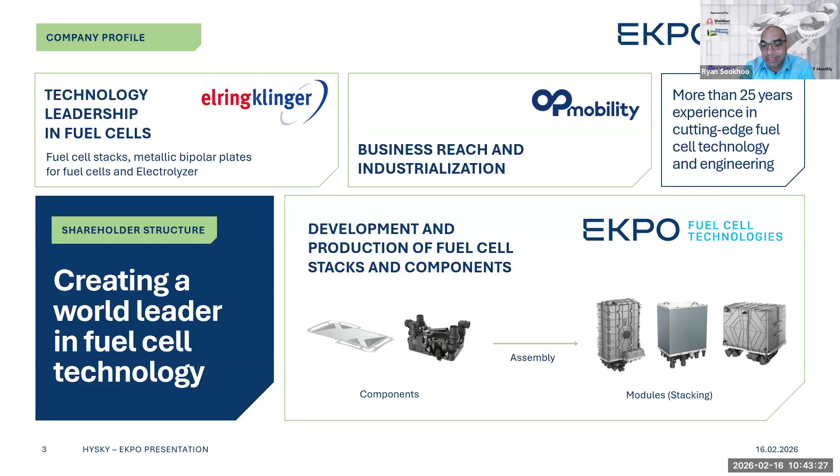EKPO is headquartered in Germany in an area called Dettingen. If you're not familiar with Dettingen, that's okay, it's essentially just outside a 30-minute drive from a place called Stuttgart. I'm sure you've heard of Stuttgart, home of Porsche. If you ever get a chance, you can actually go to the Porsche factory and do an amazing tour.

EKPO has complete stack building mass manufacturing facilities located in Germany, with roughly just over 220 employees. We're continuing to scale to build into those key markets we're talking about. This facility was established in 2021. I'm going to show you some amazing videos about it. I think you'll be quite impressed by the investment we've made in bringing mass manufacturing and a high level of quality into the fuel cell application.

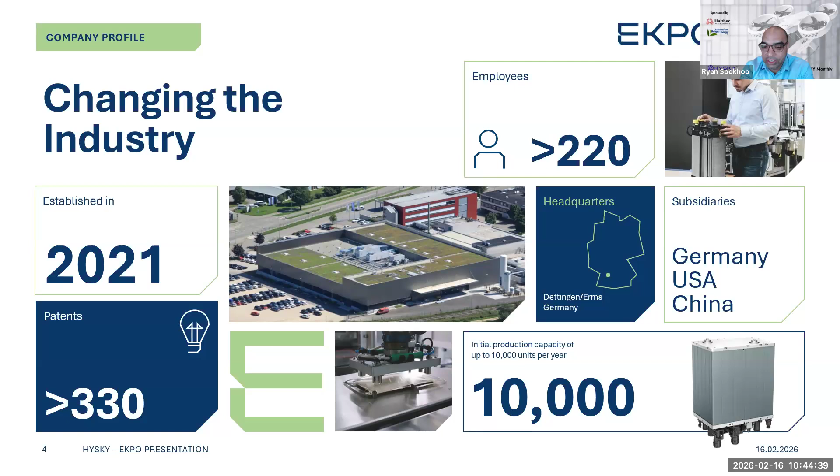When we stare into the product offering of EKPO, it's really about addressing the markets that are moving today while leveraging our core technology. I'll start with the unit on the left, the NM5. This unit was designed with modularity into it, looking at applications where the power node may not be that high, below 30 kilowatt or even 15 kilowatt. But there were applications such as material handling, potentially even drones, where this lower power node, this sweet spot around 15 kilowatt, the architecture we had as a fuel cell had great value, because at 15 kilowatt, all of our fuel cells are liquid cooled.

Once you start to drop below that 15 kilowatt node, you start looking at other technologies such as air cooled fuel cells. So we made the determination that at this power node, having modularity and enabling our partner to scale as their business needs grew by putting multiple of these units together. We have the ability also on our stack side to put it together to essentially act as a partner.

We don't make full systems in the sense of a complete power module with all of the balance of plant. We work with our partners to understand, are they at the stage where they want us to contribute a little bit more on the balance of plant, or the fuel cell? We'll get into how that relationship varies with EKPO, because that's a big part of our DNA.

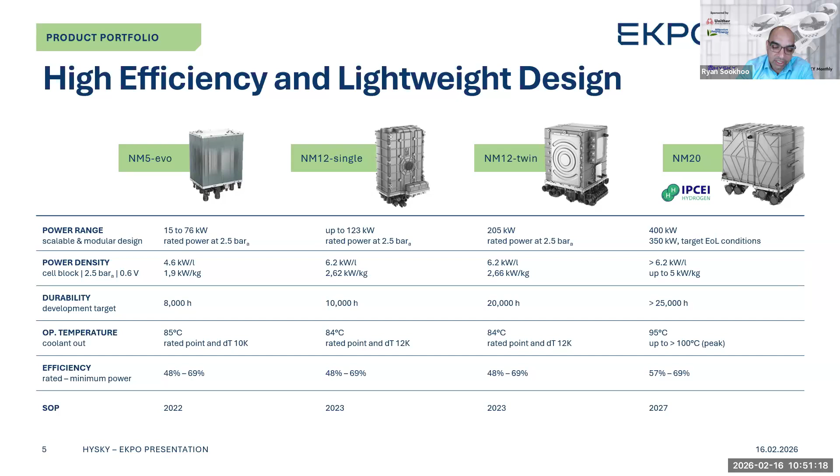When you look into EKPO's DNA, at the end of the day, I think I said our mission is to partner with the industry, and that means being flexible on how we engage with our partner. So there isn't one way only to work with us. We recognize that we're making the investment also in the technology, but our partners are making sizable investment in building the systems. So there has to be great value for them.

And our strength is really around the stack and what I would call critical balance of plant supply, meaning those key components that are needed to run the stack efficiently and get you the best performance possible. So traditionally from EKPO, you will get a stack, which is this blue area that you see here, highlighted as stack module. And that comes with the enclosure, it comes with the cells, and it comes with all the required sensors needed to monitor the stack.

But what we don't do is we actually do not supply things like the coolant pump, because those things, back from the integration days, are very sensitive to the application - where you put a pump, how to service it, how to prime the cooling system. All of that learning, we realize it's better to have our partners take care of that part. And that includes the anode recirculation loop, which is quite important for a fuel cell operation.

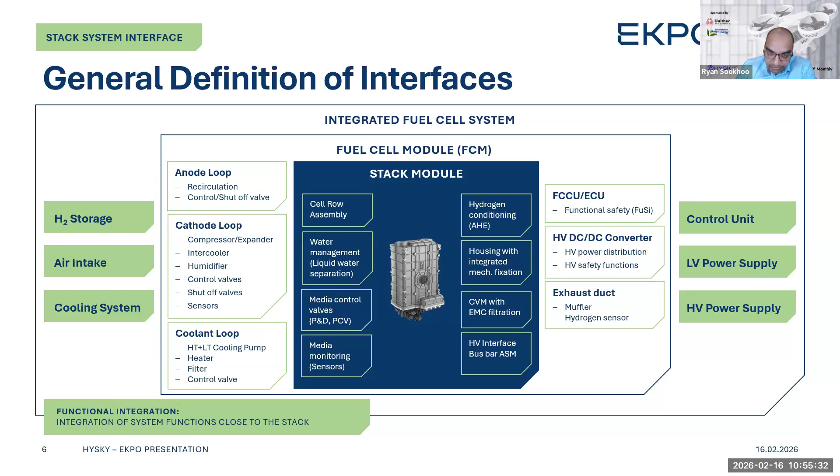For this part of the presentation, I wanted to highlight the video because it's really important for you guys to feel how real this market has pulled forward and the investment made. If you ever have a chance to come to our headquarters, we would be happy to host you, for you to see the fully automated lines operating. As you walk through our massive facility, you will feel the production element around it. It's not a prototyping shop kind of feel. When you go through it, you feel that element of production level and high quality, like repeated volume initiative.

And we made this investment in this facility because we also want to drive down the cost, right? We want to show that making the step into mass production, while pulling along the technology, is our role, to basically give you a high performance unit with the lowest possible price. And as we talked about, our parent companies are very large in mass manufacturing, so we're able to leverage their learnings, their buying power, to basically bring all that benefit to the fuel cell market.

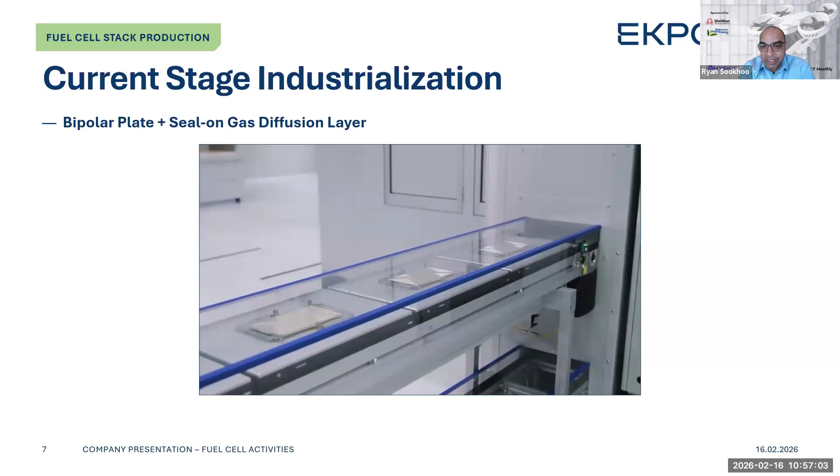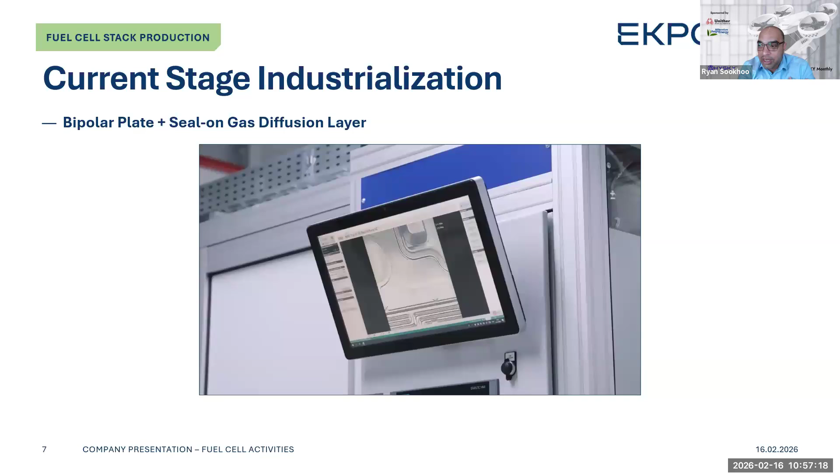So hopefully this video comes through, but it's essentially fully automated, this facility. And as you can see, the lines with all of the laser checking, the plates are inspected, built, seals are added, compressed fit, welded together, and they're also cleaned throughout. So you would think that as you go through this facility that these fuel cells are being produced at tens of thousands a year, because of the scale of investment and quality that we put forward.

And as you saw, the molding and seal, these are critical parts of the fuel cell's durability, and that's why we automated it to remove any possibility of quality issues that would be down the line.

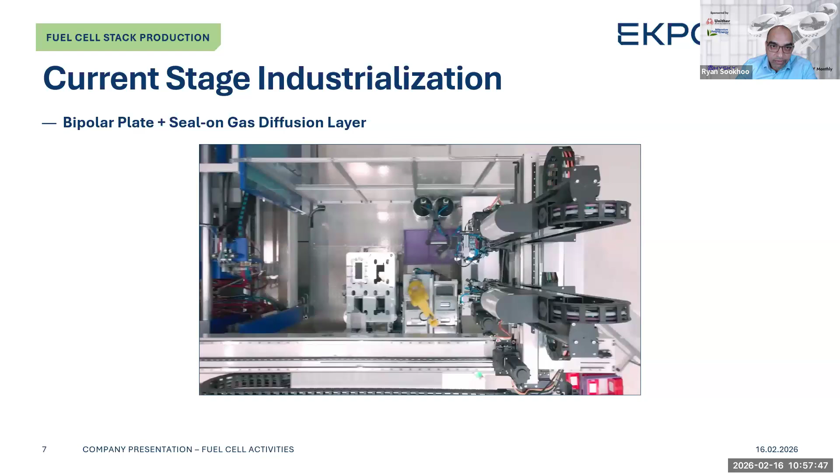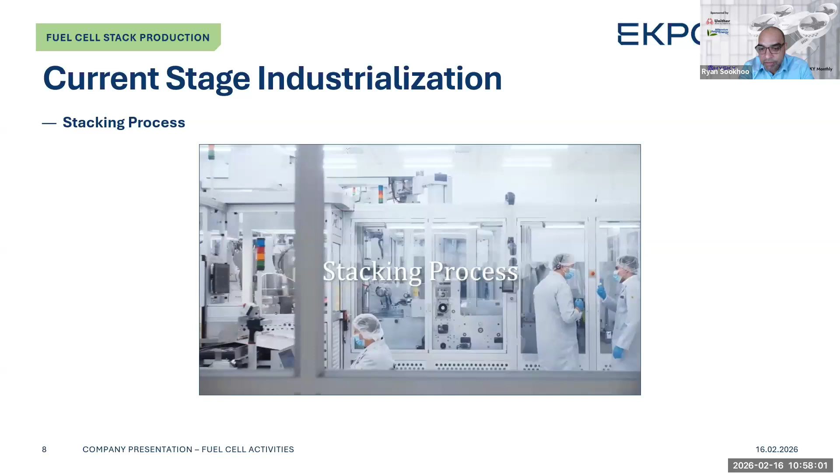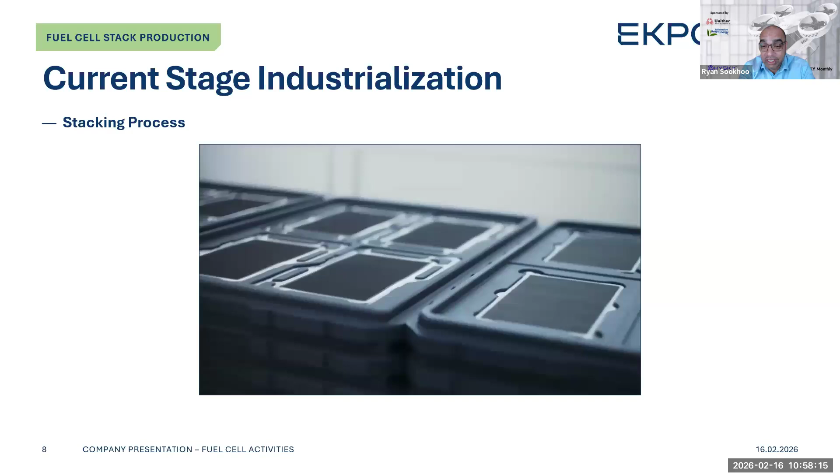We took that same level of investment from a component stage of production and quality, and we put it into the stack assembly. So all our stack build is fully automated. And in order for you to get access to the stack room, you would essentially have to go through about 3 clean rooms. So high level, high focus on automation and high focus on quality, as we are trying to show this repeatable level needed.

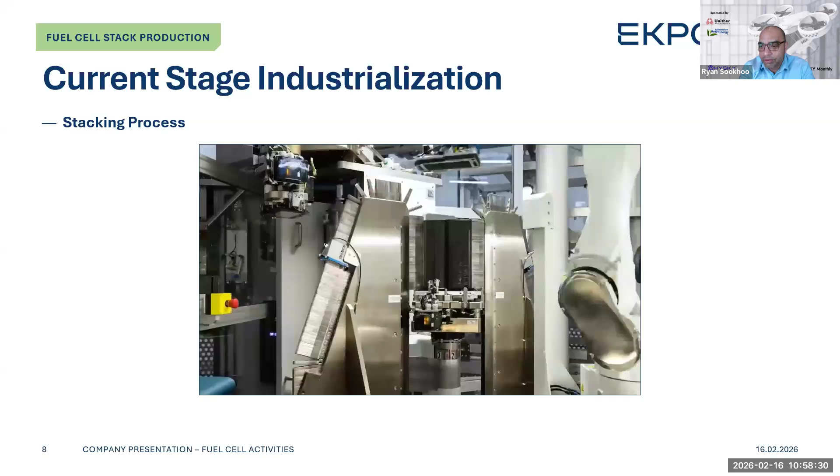And I think that's a really big story when you're looking at aviation and wanting high quality behind the products that you're engaged in, so that you feel it's completely repeatable, and the performance is the same all the time.

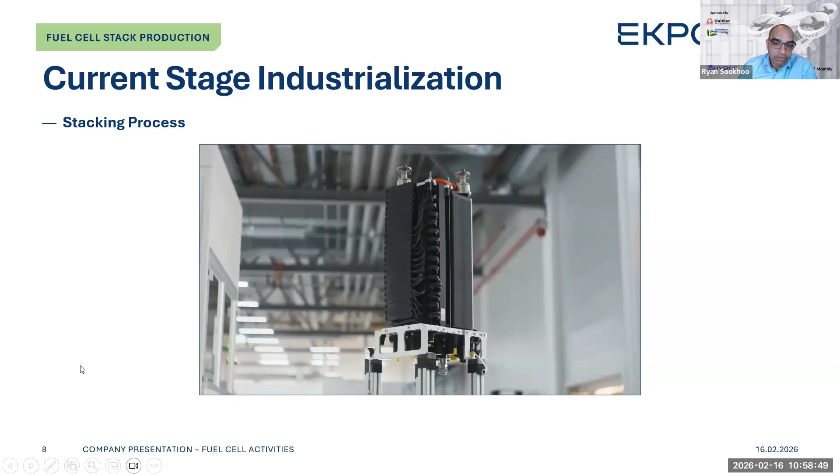Today, we use a lot of traditional application to continue to field test and gather data. Our hope is that these things will continue to mature as markets and grow into sustainable business units. But at the end of the day, we think they're absolutely worth supporting, because it brings forward the technology to the aviation industry.

We work within the rail industry because of the high demand and utilization, vibration, impact. That all gets translated and we validate our unit architecture and design. It's a high uptime application. So the impact on life, utilization, efficiency of the fuel - those are all validated through that application.

And in aviation, you'll see two applications with zepp.solutions at the bottom. From the early days of me working in the aviation side, ground support equipment was absolutely critical about introducing hydrogen to the ecosystem. And I think this needs to continue. We can't just focus on the end application. It's the safety around the fuel, the acceptance of the fuel at airports is also critical, or even in space. And I think ground support equipment offers that initial step to bring hydrogen into the ecosystem.

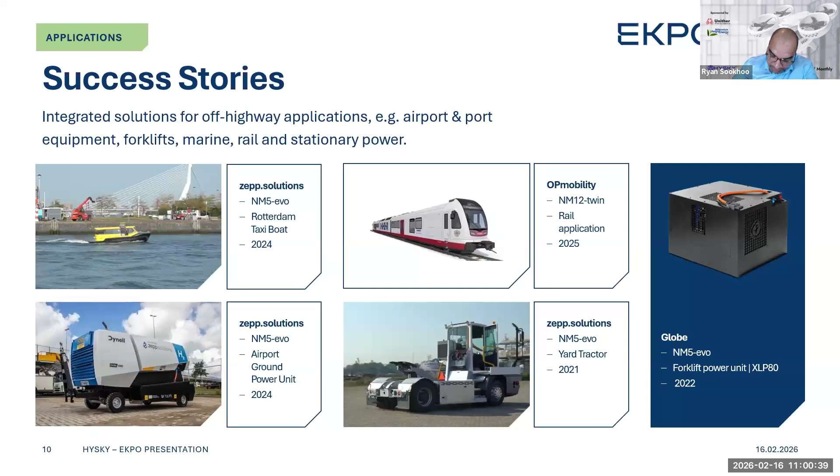When we look to, well, how do we generate scale? Because that's needed to help us address our costs. As we made the investment in a mass manufacturing facility, we have to keep a line of sight also still to what I would call the automotive or mobility application, a traditional land-based one, because that will help with the purchasing power of the base material. It would also help with the fabrication.

In aviation, we can align on certain form factors of those fuel cell designs to benefit from that volume market. So that's why we keep this interest in driving this application, and the durability of these applications. They're high run hours, so that information also gets translated through and fed back into engineering, because at the end of the day, we're trying to build the most robust application.

When we look at what we're doing in aviation, I think it's quite impressive. There's a program inside EKPO, a joint venture with Airbus, working on the aviation fuel cell stack technology needed for aerospace. That program is leading to a lot of cutting edge applications, as aerospace criteria are much higher than anywhere else around the world. Can a fuel cell be designed to meet that target market? Absolutely, and we're doing it with the AeroStack program. As EKPO, we're able to leverage that learning where possible to bring to others.

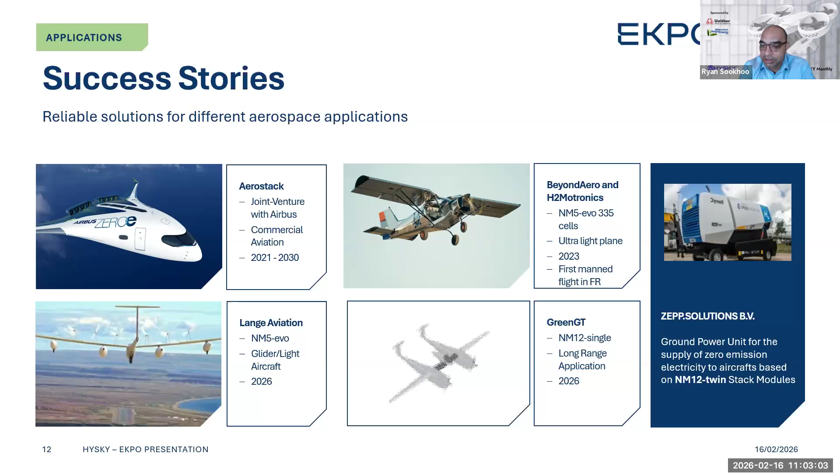This market will continue, and I think you will continue to see EKPO playing a big role in these forward markets in the near term. That's just because of how sound and proven the stack technology is, that it's finally being recognized by aviation and being pulled into that market. Given that there's a core focus because of our aviation program within EKPO, as potential partners in this industry, you're not carrying that on your own. You're working with a company that has a high focus on aviation and bringing hydrogen to it.

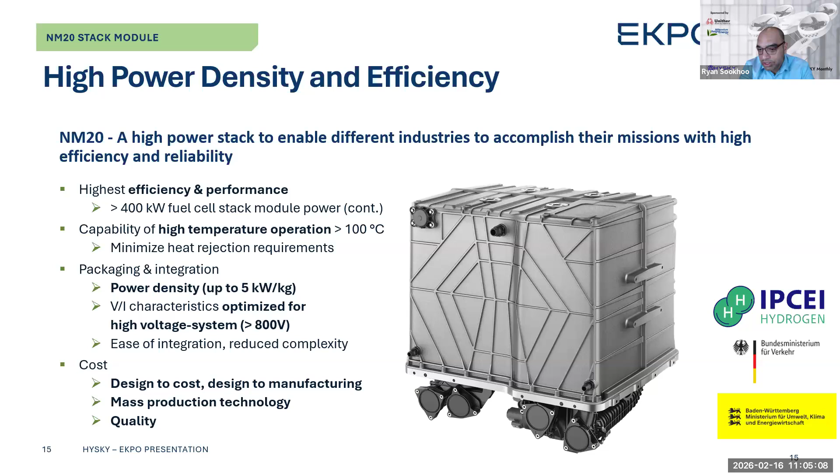To show that this unit is not just a fake unit, so to speak, I wanted to showcase some actual data with you. If you're not in the fuel cell industry, don't worry about it. But the key is, the way to know how well a stack is running is to run it at its full potential, the highest power you can, and then look at the degradation or instability in the cells. That tells you how sound the technology is. If you saw the cells having weak points at the edges or in the middle, it would highlight a weakness in the stack performance.

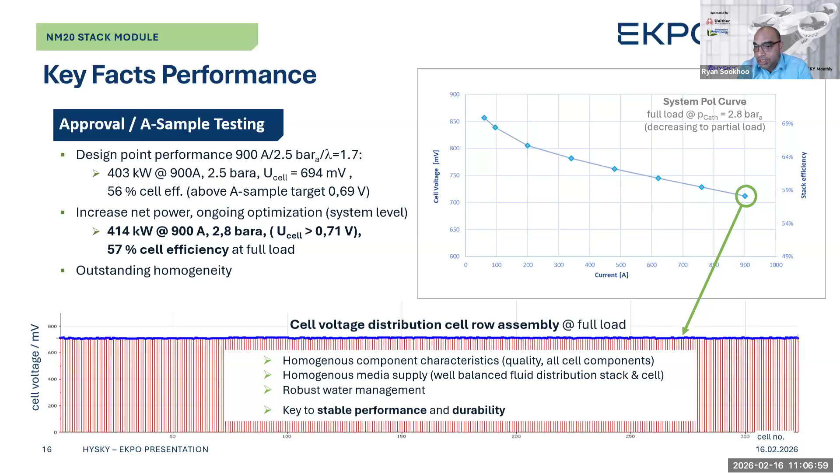Yes, we're generating 57% efficiency at full power, but how often do you run your engine continuously at full power? It's common practice in any industry to target the right level for that engine to give you efficiency and power production. It's a balance of multiple factors, and that's fully in view from the stack performance. When we talk about stack performance, yes, there's stability in the cells as the previous slide showed, but the key is the degradation—can you actually achieve those run hours that you're claiming?

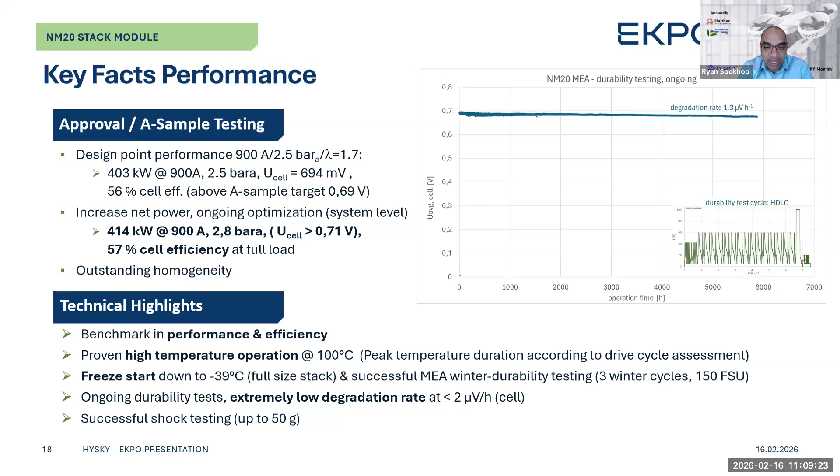Why is that microvolt number so important? That's the proof - when someone says on a slide that they can get to 25,000 plus hours, it's this microvolt degradation you're looking at. This is actual data we're showing you today. You can see from the degradation chart that running this unit at various load cycles - starts and stops, up and down, which is much more strenuous on a stack than keeping it uniform - the degradation is actually very, very small. So with this actual data, we're confident this exceeds 25,000 hours on this platform, while maintaining cell stability, withstanding significant shock, and handling harsh thermal cycling.

Zeroing in more on what we supply - there are certain components that come with our unit just to help with integration. We supply what we call a media unit, the black part at the bottom, which comes with critical parts like solenoids, pressure switches, and the water separator, for ease of integration and service. We think these are critical to stack operation and not as driven by the end application, unless there's a certification requirement around certain solenoids - in those cases we can modify the unit to comply. We're trying to simplify integration while increasing reliability by supplying the right parts to run the stack, while other components can be supplied by you as an integrator to benefit your own IP and core knowledge.

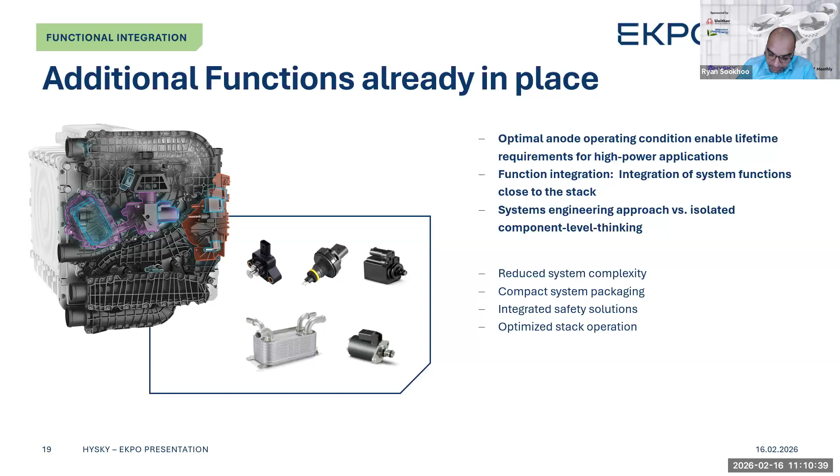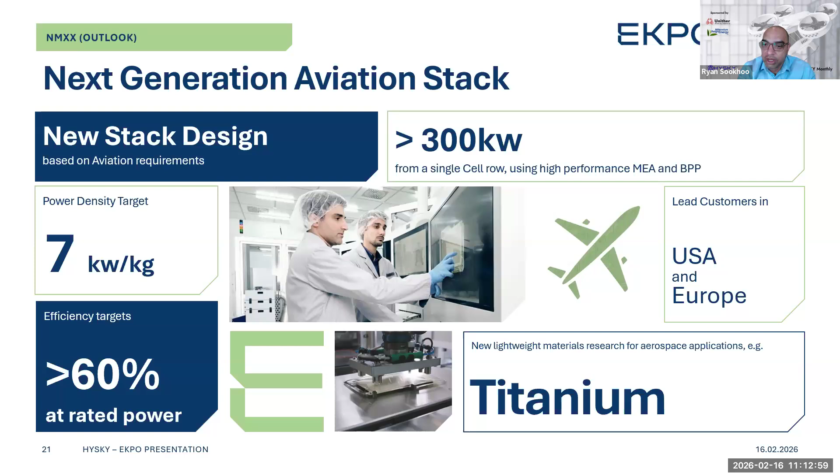From the weight benefit standpoint, we see this as today's technology. Through our internal development program and expertise in titanium, we can use titanium as a base material inside the stack plate. It's currently limited to customers who specifically ask for it because it's higher cost versus traditional plate material. If we were to use titanium for an aviation application, it could significantly improve the gravimetric performance. Combining all these factors, we think the NM20 is a great starting point when you look deeper into aviation and what could be achieved. I have yet to see others in the market, as a stack company, genuinely bring forward something with this level of performance and expertise.